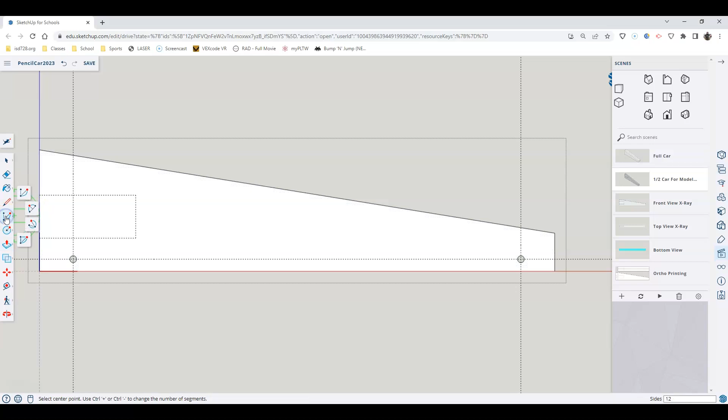To do this, I'm going to start with using the arc tool, but you want to use the arc tool or the line tool to make this path. We want to make sure we've double-clicked in, which I've already done, or right-clicked and edited the component. You can see the gray box around it. It doesn't look as dotted as your box usually does, but it'll work.

In here, we want to make sure we're not selecting directly under our axle, but off to the edge here, because we can't remove material below. So I can select the edge, then go above my car where I want this arc to stop. I want to be a little bit above my circle, not right on the edge, and then bend my piece going forward.

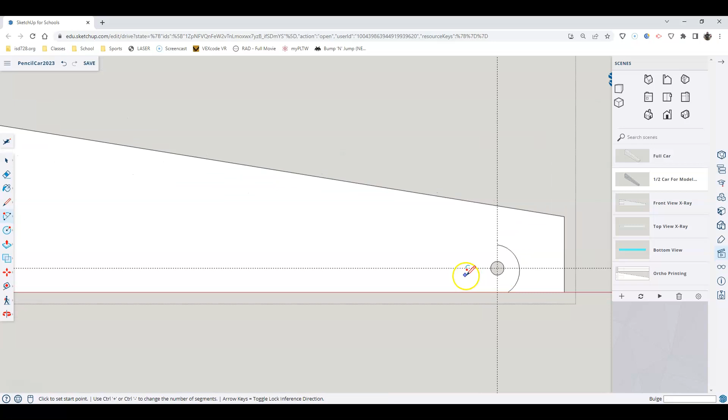All I want is a subtle bend, not adding material. After I drop that, the next thing I'm going to do is use my pencil tool, which is the line, L on the keyboard, to select the edge and then go back right around my midpoint here.

After I do that, I'm going to go back to the bottom of my car, once again not cutting away from underneath my axle hole, but just behind that. Now that I have that shape, it should be connected from the bottom edge of my car all the way around.

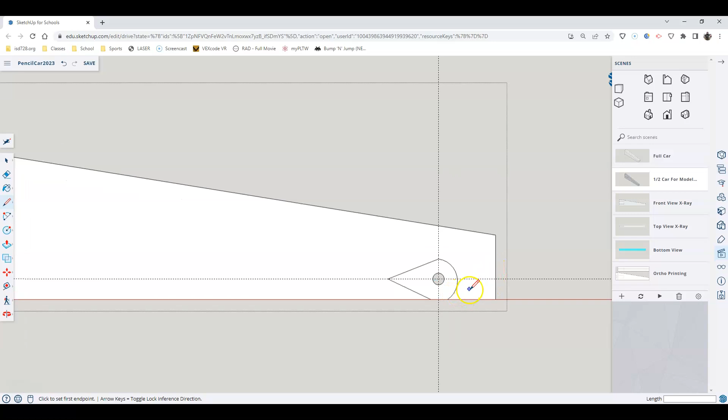If I ended up wanting it a little bit longer because I'm at the minimum length, make sure you touch the right-hand edge here. But I am at the 300, so I have plenty of space for my car to be a little bit shorter. Now, in here, I want to do the same thing on the back.

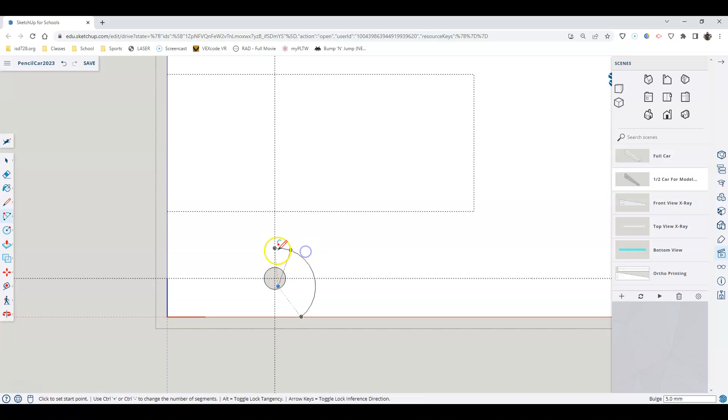So, 2-point arc. There's my intersection directly below my hole. I'm going to be a little bit in front of that. I want to go above this, very similar to my last one. Bend that up and out, and then use the line tool to finish this off.

From that endpoint back to my line, and then back underneath, making sure we're not underneath the axle hole, but just in front of that.

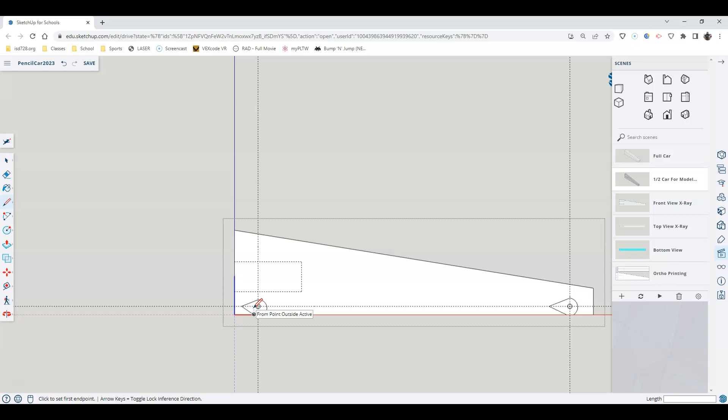Now that I have my front shape and my back shape, those do not have to be raindrops, by the way. Those are just thinking aerodynamics. You can make any shape you want there as long as it connects to the edge of your car, so you can pull that other shape out later.

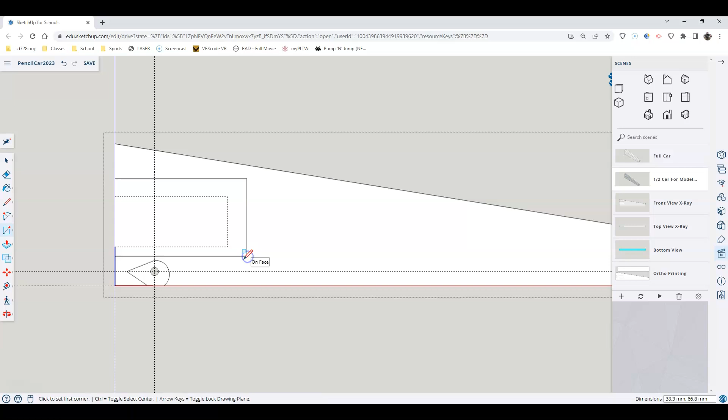The next thing I'm going to do is take my rectangle tool and go above my intersection here a little ways. I could make a guideline about 3, maybe 4 above, but all I'm going to do is slide up, go above my piece a little bit, and below a little bit, and in front a little bit of my actual rectangle, showing the space from my CO2 container. Now that I've dropped that, the next thing I'm ready to do is push-pull those shapes out to finish my front view here.

So this next step is going to the ISO view, and then going to our push-pull tool, selecting the front-hand edge, and then clicking the back line right here. So if I select this front, I'm going to push straight back and click on the edge. Most times when we select here, we will have this back edge delete.

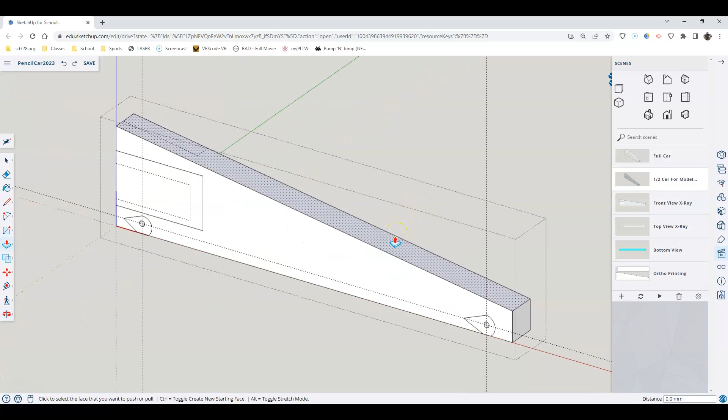I'm just going to edit, undo, and try one more time to see if that'll happen. Not on the face, but on the edge. And if it doesn't delete all the way, don't worry. Later on, we can select and delete that at the end of our process.

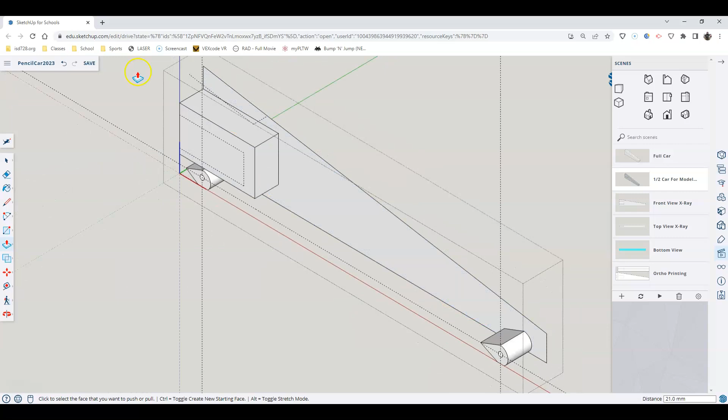So there is our front view. And all we have to do is go back to our front piece there, and this will actually go to the ISO view, because that way we can see what we actually have done. This will be our screenshot for that front view video.

Thanks for watching. In the next video, what we're going to do is connect our shapes from front to back. Good luck.